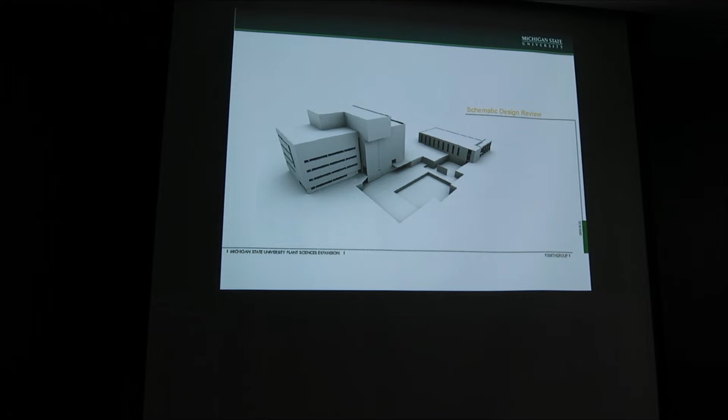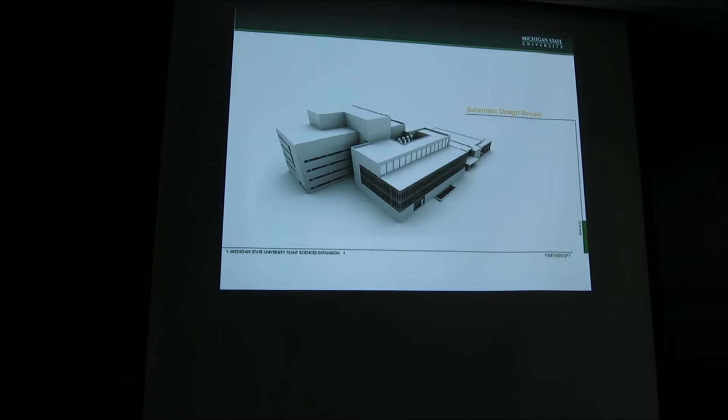One of them is the Molecular Plant Sciences, a new building connecting two existing buildings. By connecting them with this new addition, it became the face of this whole complex and allowed people to utilize research and equipment back and forth, using the greenhouses between the buildings.

It was one of the early buildings on campus with the concept of an open plan for researchers. Instead of having separate rooms, this open plan allowed researchers to work right next to each other, think about ideas, talk about ideas, rub elbows a little better, and share expensive equipment in their labs. It was really a new concept that we introduced here.

This became the face or entrance of the whole complex, and it's funny that both buildings think it's their building—it really belongs to both and added a new face to their operation. Inside, there are a lot of formal and informal places where people can sit down, talk, and share ideas. Don't undermine just a cup of coffee where you talk about what you did over the weekend or what you're doing next.

I have a nice, well-equipped technology auditorium in this building that replaced an old-fashioned one that was there before.

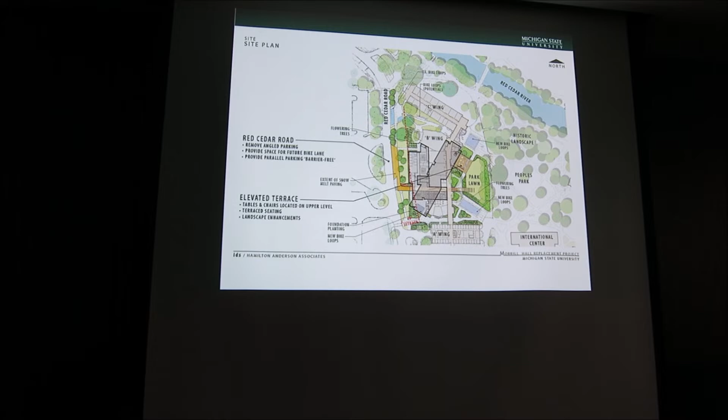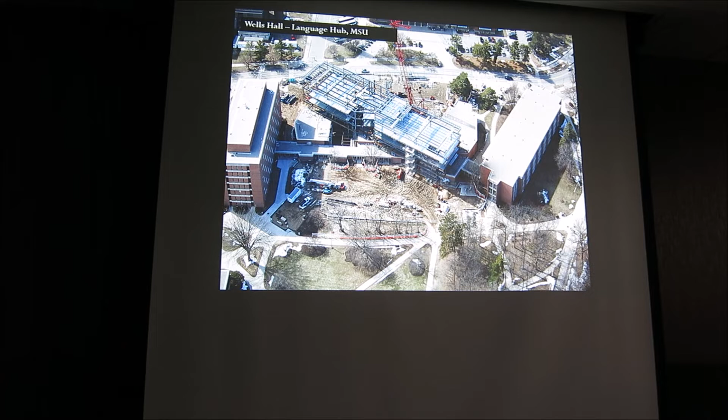I was also involved, as Dr. Muhammad mentioned, in building the Wells Hall addition. It's really an interesting project—a new structure on top of an existing B-wing. We had to literally thread the columns and foundation of the new building into the existing one and come up with the addition, which ended up being a great addition to this whole part of campus.

Beautiful outside areas that kind of link the education, where people can sit here and watch and see people walking back and forth to the bridge.

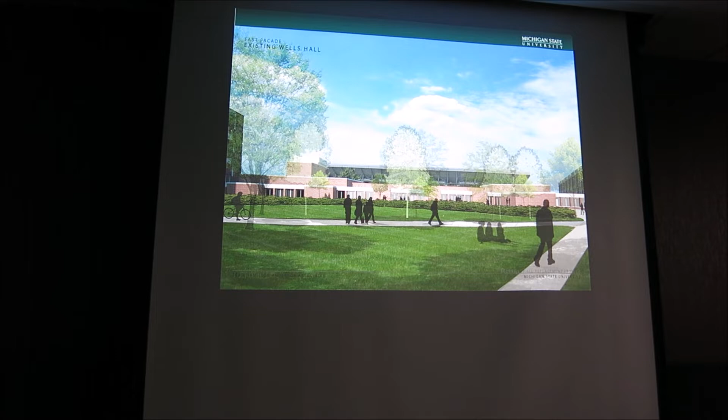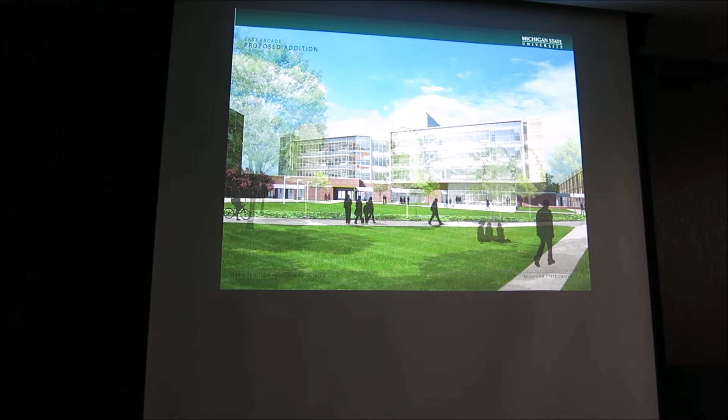This is what the building looked like, very bland, one story, nothing really special. And here it ended up with a facade that overlooks the park, so everybody in that building really enjoys the scene and the outside of this historical place.

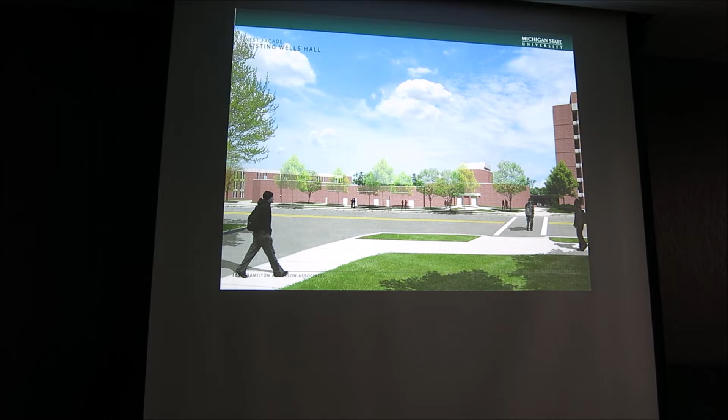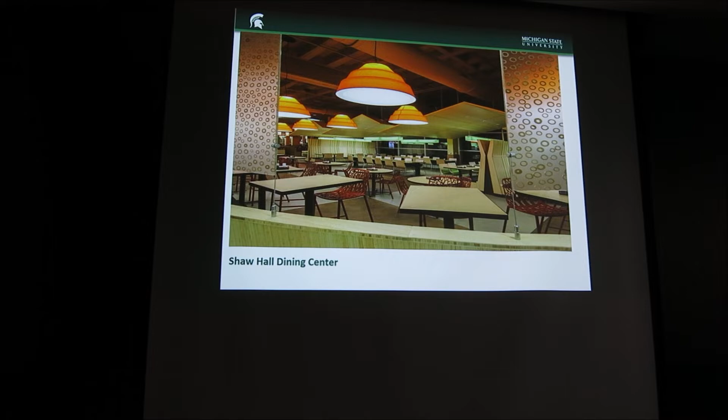You can come to the space many times without eating the same food or sitting in the same place, enjoying the different variety. More importantly, it overlooks the river, which is a beautiful scene all year round. This is another shot of it.

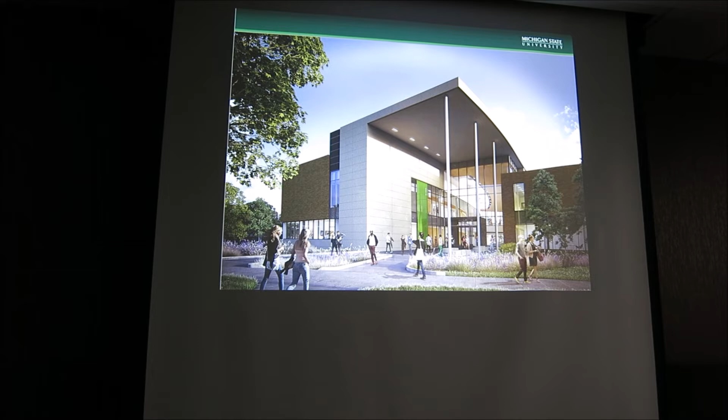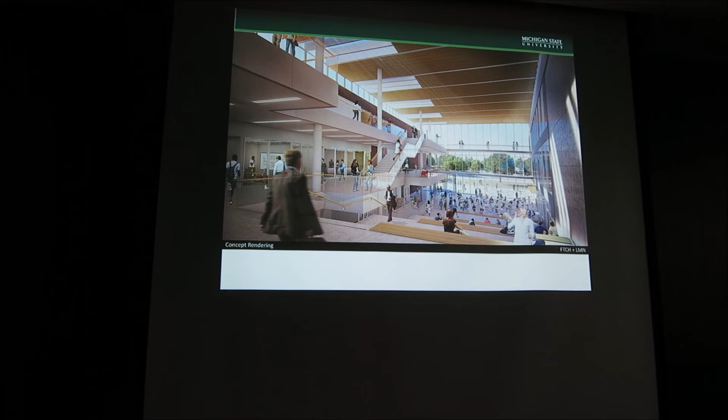One of the latest ones we just finished designing, and it's under construction, is the Business College. Most of you might have seen it on Shaw Lane. It's going to be a one-of-a-kind building on campus, with a place where students can sit and overlook the riverside, talk and interface in this beautiful atrium setup we created. There's a beautiful lawn on the north side facing the river, with a lot of activities connecting inside and outside.

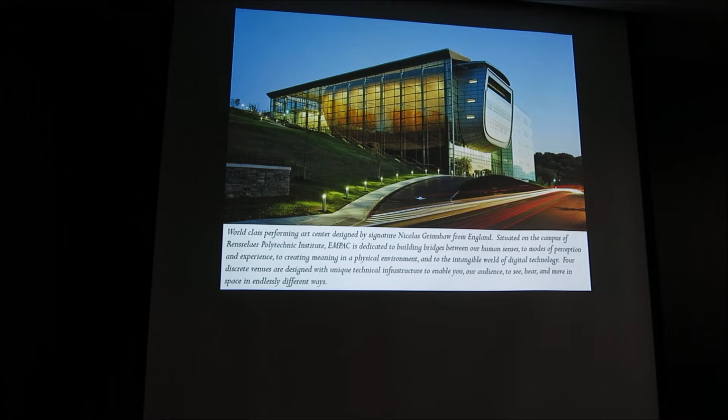I was also involved in another university, RPI, Rensselaer Polytechnic Institute, which had about $400 million worth of capital projects that really changed the face of that campus. This is a very interesting, one-of-a-kind performing arts center, built on a sloped hill. The idea was to build the hull for the concert hall so it looks like a ship sitting on that sloped hill.

It's designed by a signature architect from England. Beautiful place - if you ever go to Troy, New York, make sure you get the chance to look at it.

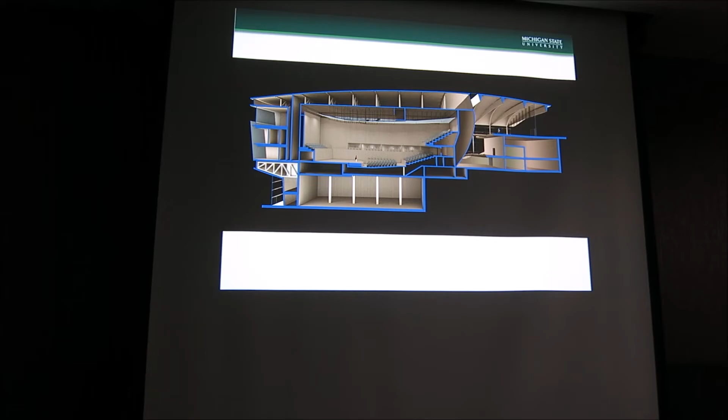This would show you how we set this building on that sloped hill, built the stub here, and anchored it all the way to the bedrock to hold it so it doesn't slide down the hillside. Very interesting project, also one of the earliest interdisciplinary research buildings built there, and it really made a big change in what the university is doing and the face of that campus.

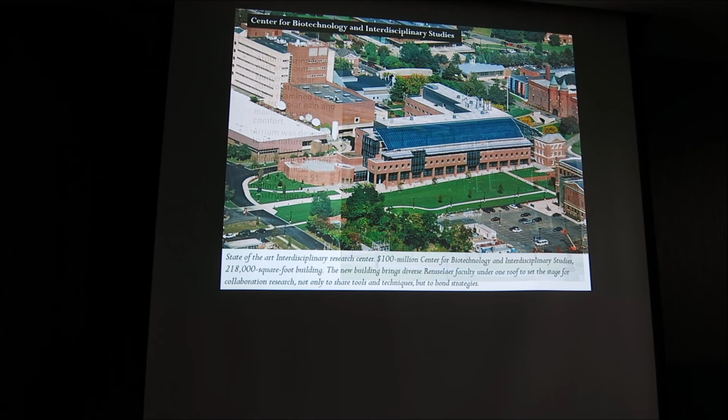Was also involved with MSU in Dubai. The entire campus housed more than one university, and MSU was supposed to be the anchor university there. We took the first 3 floors of the main building of that campus. Unfortunately, in 2008, they had the economic fall down and things did not work out economically, so MSU ended up pulling out of Dubai.

But one of the things that kind of shaped my career, especially with Islamic architecture, was working with this Egyptian architect, a world-renowned architect from Egypt who was way ahead of his time in terms of sustainability and what materials to use. His name was Hassan Fathy.

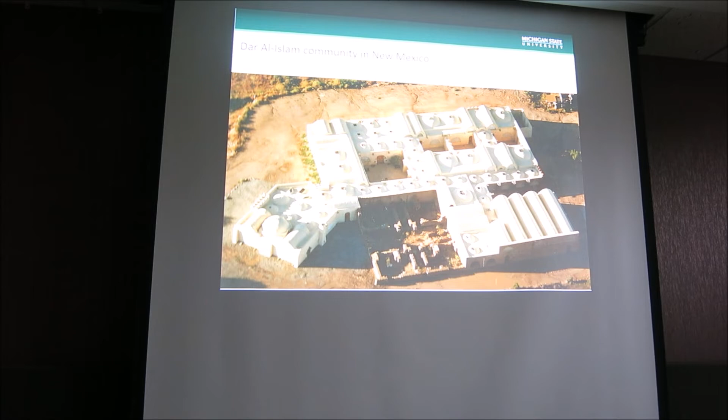He built a whole community here in the United States, in New Mexico, close to Santa Fe. It's a beautiful community using the same concept of mud brick, with the styles of domes and vaults.

We start with the mosque architecture. Architecture form becomes really the vehicle of the content. They can really symbolize what they are for. This is a fascinating thing, how architecture design can reflect some of the thoughts and beliefs of people. You will see how this has evolved and developed in Islamic architecture.

Architecture not only communicates the looks, the shapes, and the feel, it also has to function for the purpose it was built for. Masjid simply means a place of bowing down. This is how Muslims perform their prayers. They pray five times a day, and you can imagine having to work your schedule all the way around five prayers.

The importance of a mosque in the life of Muslims, and how this works in different places. However, you do not have to go to a mosque to pray. You can pray in your home, or any place that is dry and clean. But it's encouraged that you do it in congregation.

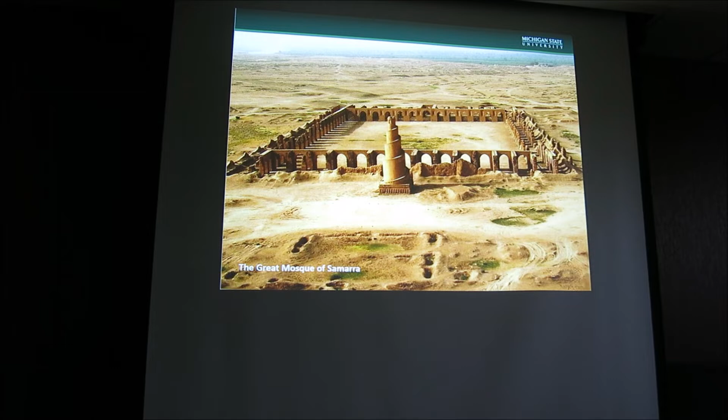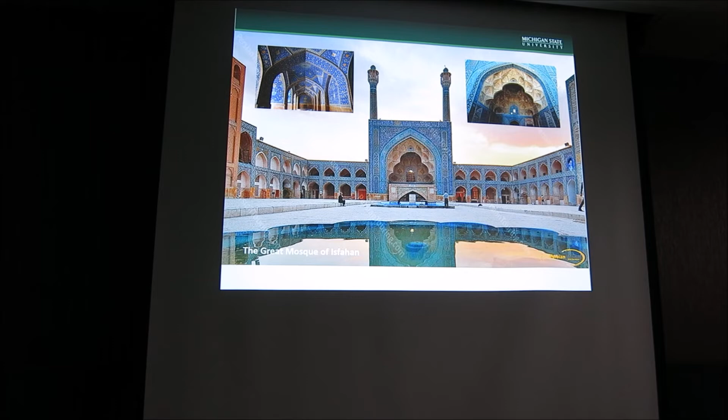If you look at some of these, it's really fascinating to me how they use different materials to accommodate building different mosques in different parts of the world. Everywhere you go, you will find that taste of what that mosque was built in and what it represents for the culture it was built in.

When Muslims pray, they orient themselves towards Mecca, so any place you build has to accommodate that orientation in how the building itself is oriented. The mosque is not an isolated building by itself - it's always connected with the sky, with nothing preventing that connection. Even when protected from the elements, you should not isolate yourself; the roof should not cut you off from the sky or that connection.

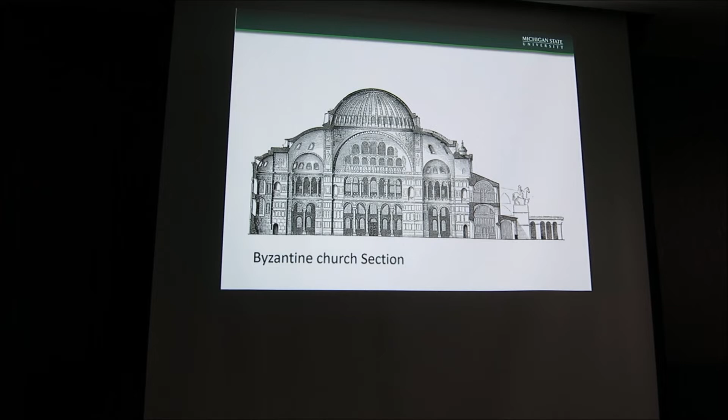It's not a building that's enclosed on itself, like you would see in a church. If you see here, the church dome and ceiling kind of represent the sky, and the walls and floors represent earth. So when you walk in, you really have this whole structure expressing itself.

In Islamic architecture, they changed the shape of that dome. Instead of looking like a half circle as in a church, they changed it to a different shape, which I'll show you in a minute to make it easier to understand.

On the left-hand side you have the one you'd see in a Byzantine church, and on the other side you see a square built on half arches, then a circle, and then the dome itself. Every single part tries to point upward towards the sky.

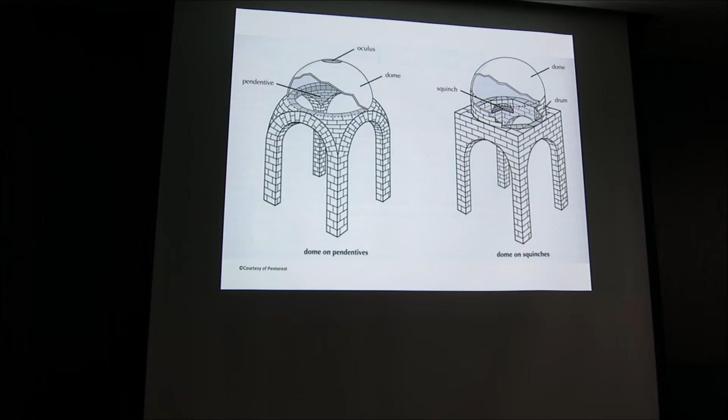Here's a look at that dome. It sits on a square, goes to an octagon, then to a circle, again narrowing down, pointing to the sky. And this is what it looks like when it's over and done.

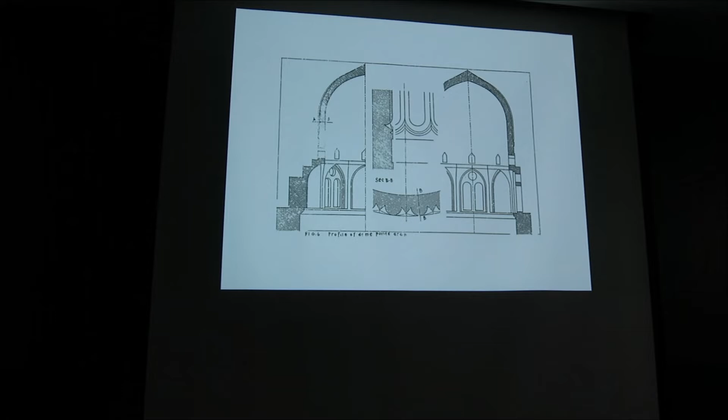The spheric form of the dome itself was modified to point upward, like what you see here. It's not just a half circle - again pointing up to the sky, giving that feeling of connection going up to the sky, and that connection in relationship with the sky.

In mosque architecture, the semicircle arch is avoided. Just having one circle go from one side down to the other is avoided, and they try to use pointed arches that show the line of forces. If you look at the first one in A, the arch starts from one side and goes down to the other, while in different shapes it always points up, and your eye can catch that movement going up into the sky.

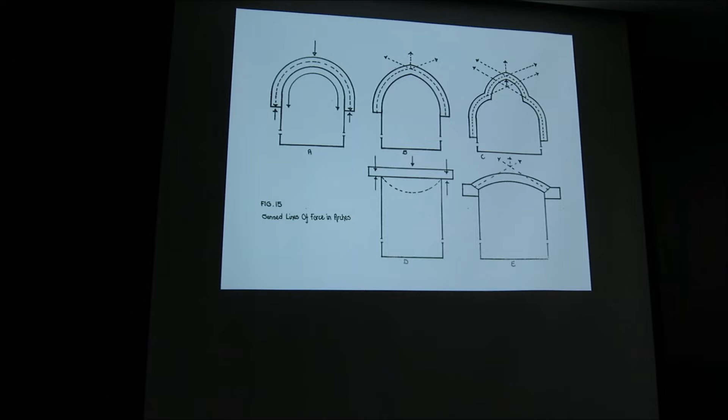In Egyptian mosques, they started doing little variations, depending on the region and people's creativity. It started to have a narrower bottom, suggesting the sphere appears to fly in the air, as if it's not just a ball. It narrows down a bit at the bottom, but it's pointing up and looks like it's flying in the air.

In Iranian and Central Asian mosques, this feature was accentuated even further, making it look like a ball that is flying, as you can see in variations of different mosques built in Asia.

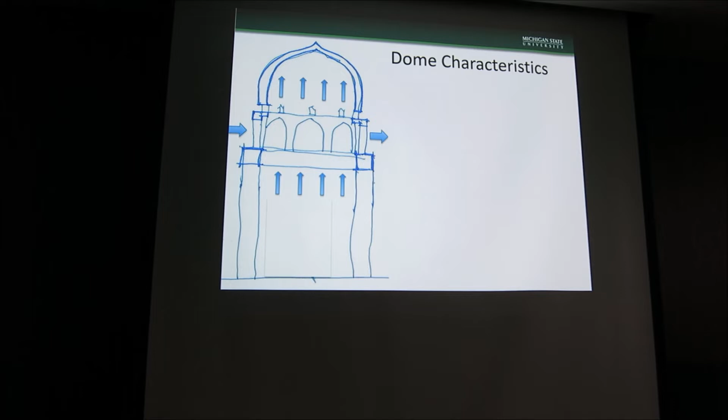The dome characteristic itself as an element is really interesting when it comes to what it does to a room like the one we're sitting in - the hot air with its directions causes adjustments in how you lay out the mosque itself, the prayer area, and the relationship with the entrance.

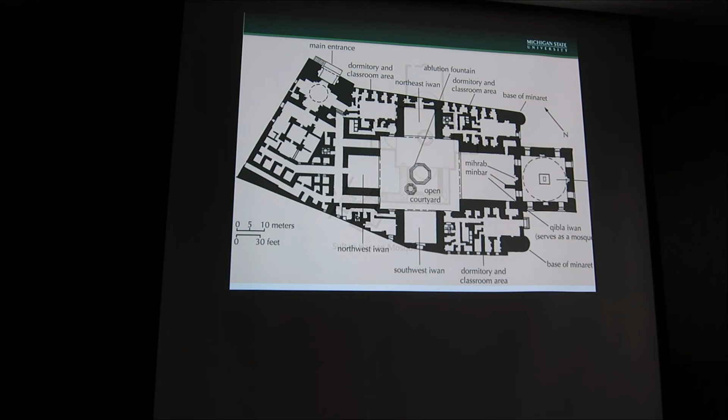If you look here, up on top is the main entrance. This is Sultan Hassan in Egypt. You see here where the street lines up - people come in, then turn around and face the body of the mosque that's oriented towards Mecca. This shows you where you start and so on.

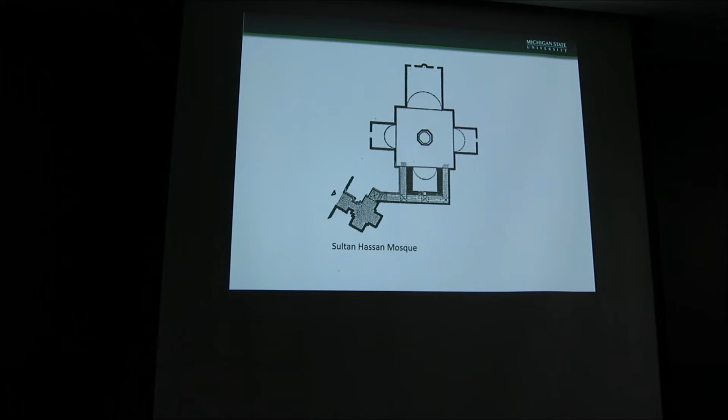Another function of that is symbolic - when you enter the mosque, you leave everything that keeps you busy and focus on what you're here for. This is a really beautiful meaning. That transition for people, from one door to the other, really gives you that transition - coming from outside with a busy life and focusing on what you're here for.

Another feature of mosque design is having only one door. They only have one door in the mosque, symbolizing the oneness of God. It also symbolizes that there's no VIP entrance versus a normal people's entrance - we are all one, all equal when it comes to where we're going and who we're trying to seek. So, equality of humanity.

Of course that's changed a little now with egress requirements based on the certain space and number of people - you need to have multiple entrances. But that was the reasoning behind having only one entrance. And entrances, as you see here, are really humble - huge and humble and lofty, resisting that and welcoming people, without a big huge canopy, flashing neon lights, and all of that.

It's really that kind of nice, sitting back, receiving people, having this huge scale when it comes down to that, in different places. And another feature in the mosque is what we call crenellation.

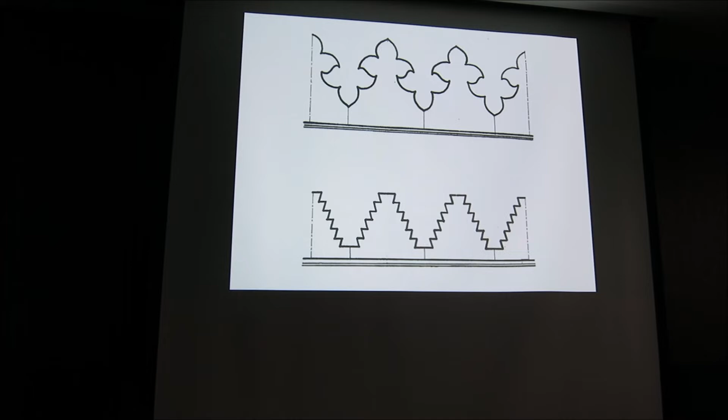This is what crowns the walls of the mosques, and it would look something like that. If you see, this is kind of interesting, because the void is the same shape as the solid - body and soul, the connection between earth and air and the sky. You have that equality that you see here in the edge of that wall. The wall is not just a cutoff of this building from the sky. Again, this whole notion of how you connect it and what that symbolizes.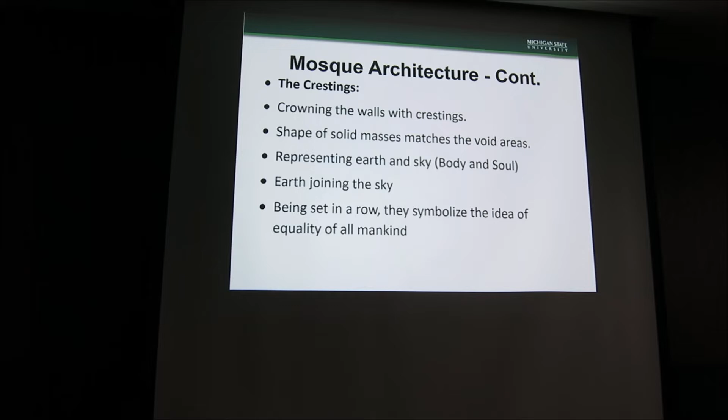It matches the void, yeah. That's also representing earth and the sky, joining the sky. Also, that lining up in a row kind of also symbolizes the equality of mankind. This is another shape.

Then we come to a minaret. Minaret is a very important element in architecture, Islamic architecture or mosque architecture. They have this symbolization of connection to the sky. It gives the vertical elevations, the elements and the looks to the body of the mosque itself, as movement upward, as we discussed in many different places.

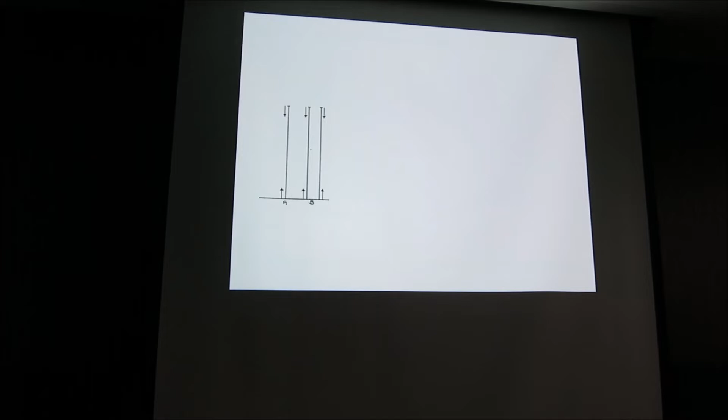Architecturally, if you look at this line here, can you tell where this line is going? Is this line going up or coming down? Really can't tell - could be anyway, could be both. And if I have another line right next to it, two parallel lines, again it doesn't give you direction. Those are just two parallel lines, it could be up or down.

But if I have this line and start segmenting it, where larger areas are at the bottom, then it goes up, your eye will go up. This gives you an up direction. Then we add another element - those lines that are parallel, they are tilted a little bit. Your eye would go towards where those two lines would meet - so again, pointing up to the sky.

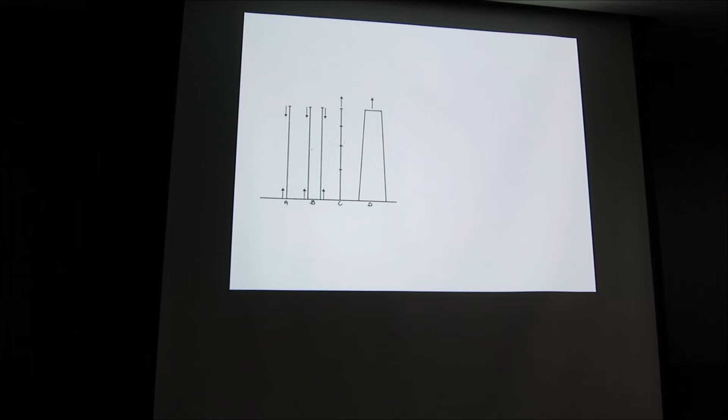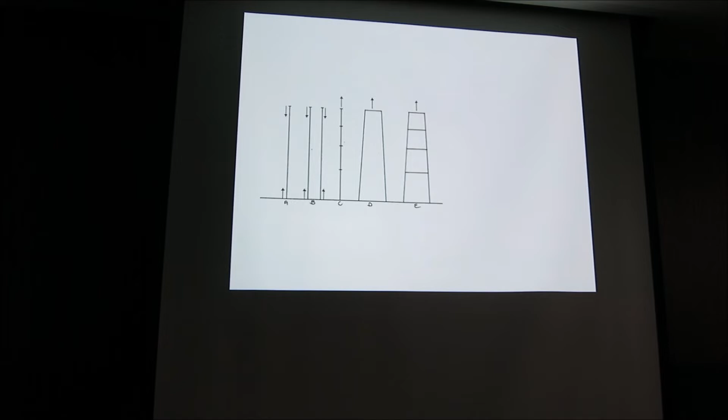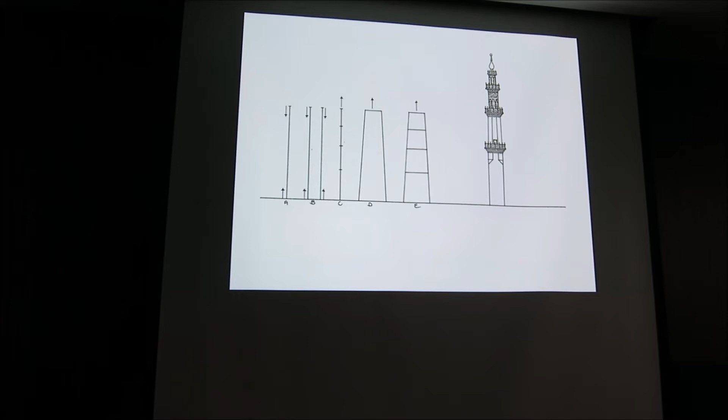Then if I add segmentation to these two lines, it would even force or focus that whole feeling and sense. That's exactly what the minarets would look like here. The bottom line is bigger, segmented, different shapes; going up it's segmented and narrower, pointing up to the sky. So it just shows you the sense of the feel, how this would look.

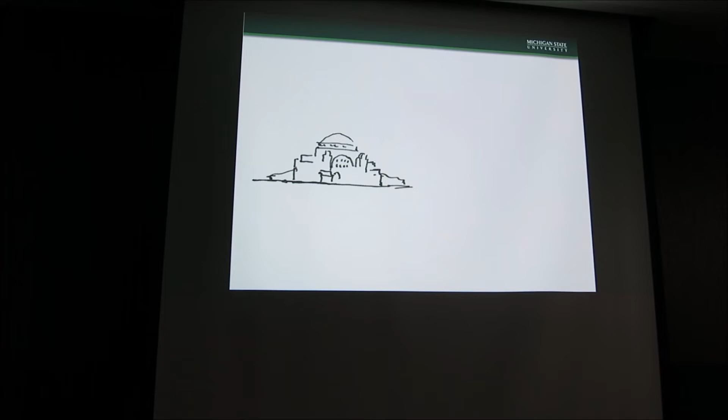The minarets changed the pointing of the building itself. This is Hagia Sophia in Turkey, before they added the minarets to it. Just look at the building here, see how it's a building that's contained and sitting on the ground. And when you look at it after building the minarets, see how that changed the whole looks and feel of the building as an element.

Traditional Islamic architecture is one of the most successful building types when it comes to sustainability. That's another subject - how these people, when they build, always had in mind how can we be, what we call now, green design. Using local materials and local techniques, and we have seen from the variations of many different mosques shown earlier, using what they have beneath their feet.

Coordination and balance between form and function - not just the shape and the looks, but also the function itself, what's happening inside that building or facility. The elements work side by side; they are not really contradictory. They all have the same goal when it comes down to the shape and what they try to do.

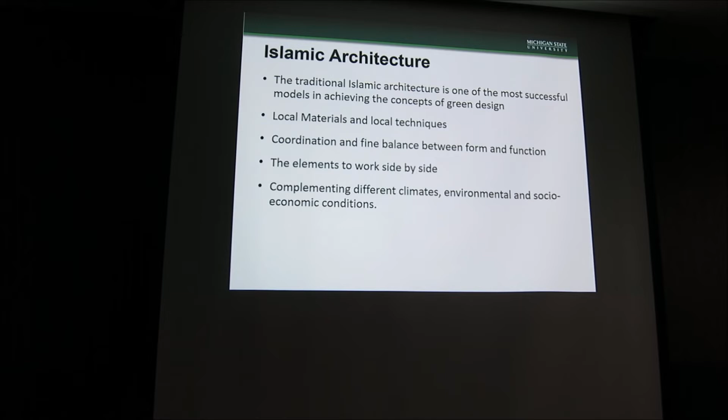Complementing climate, environmental, social and economic conditions - they use a lot of thick building walls that help with hot climates, preventing the sun from seeping through the building. It takes a while for that heat to transfer inside the building, and by that time it would be nighttime, and then the whole thing reverses from inside to outside at nighttime. So that's another thought behind using it.

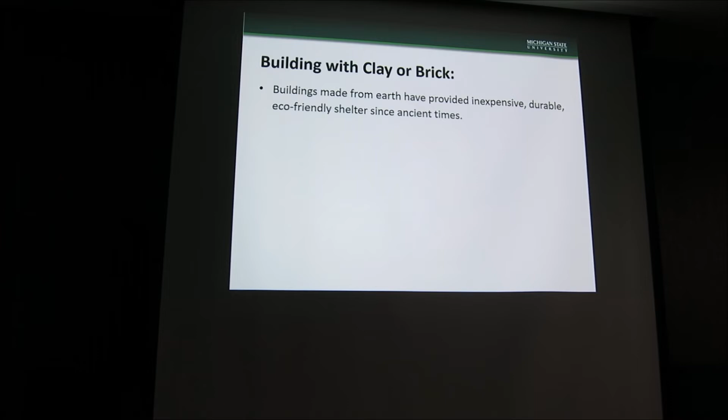Using clay or brick was very common in a lot of these buildings - inexpensive, durable, easy to find. Eco-friendly, you don't have a lot of different effects and all of that. The materials are important to protect the building from external conditions - the optical aspects, the reflection, the thermal conductivity, the heat transfer.

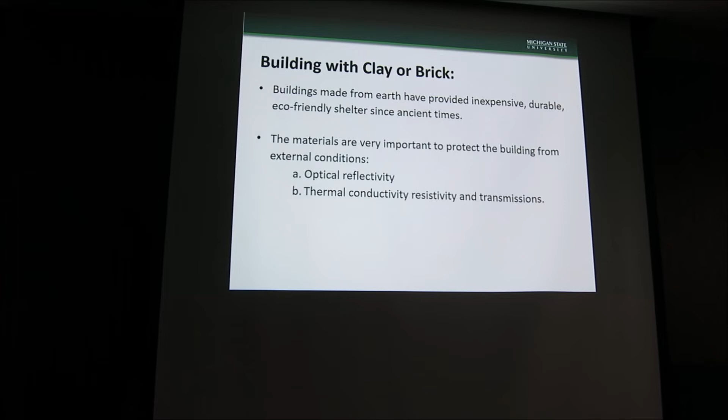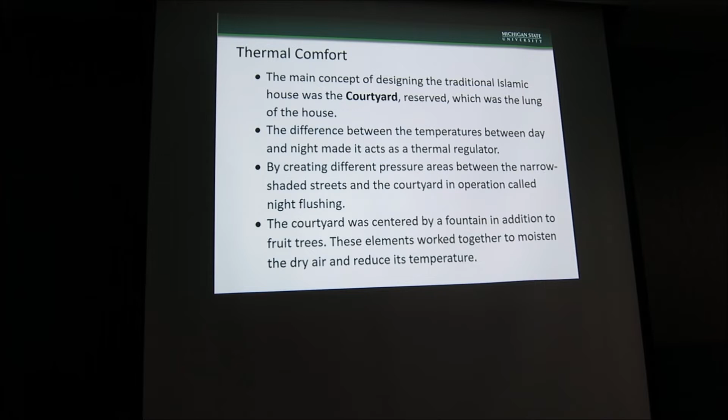That would have some trees that you might start seeing birds and seeing a lot of different things, that comes with that as an element. The shading elements, of course, the tree and all of that stuff helps a little bit with the moisture and reduce the temperature, as you see in many elements like that.

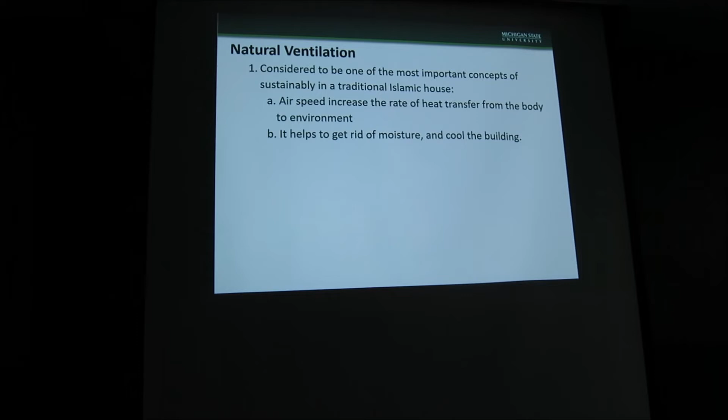Natural ventilation is considered to be one of the most important aspects of Islamic architecture. The airspeed increases if you have a narrow tube. When the air comes through it, it focuses and increases the speed of the air movement, from the top to the bottom, and it helps to get rid of the moisture and cool at night.

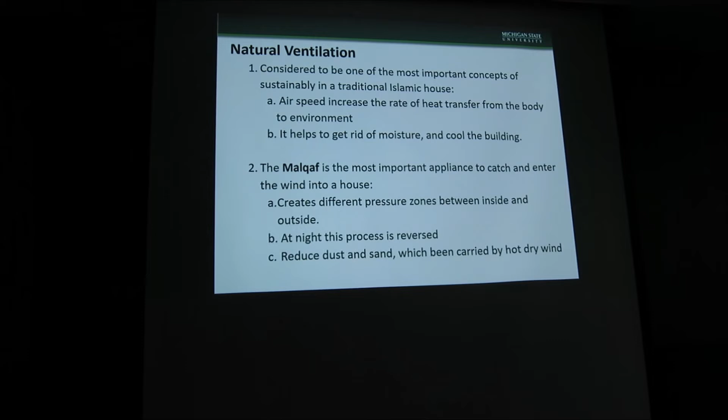So they created something called Malqaf, which is like a tower that catches air inside the house, in a narrow shaft. At the bottom of that shaft, they would put clay bottles with water, like the refrigeration we have currently with the cool air coming down. This is where the water would be, and they can cool the water out, helping at night. This whole process would reduce the dust and the sand that comes towards the house.

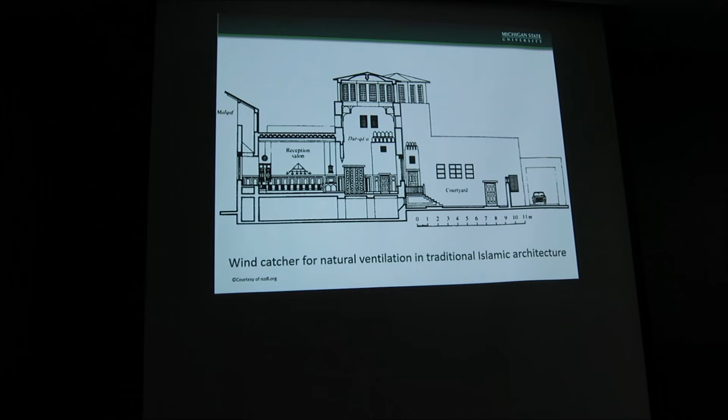These are some of the shapes, but if you look at the bottom here where the Malqaf is, the air would come in and through the house, and out to the courtyard. It really gives you that variation, creating nice wind ventilated areas, allowing for the whole movement.

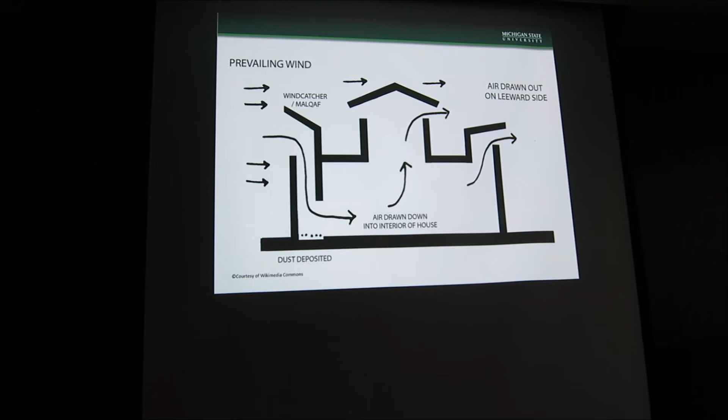I just came last night from South Korea, and I was amazed with the many towers they have. When you have a child living on the 26th floor of a building with no balcony, how would they enjoy even the natural air, the natural environment? So these traditional buildings really thought about a lot of things, including this whole notion of ventilation.

Natural light reduces the thermal load. When the sun hits the building, it adds a lot of load. When we build new buildings, we always think about the orientation, which side of the building, how big the window is, how much heat gain we will have, and that determines the amount of mechanical systems needed to ventilate the building.

So they thought of providing natural light that would allow sunlight to come in without the direct sun, without a lot of the heat that comes with it. They found that reading and vision is 3 times better with natural light than with artificial light. Windows are considered to be really a hole inside your wall, and usually the R value or resistance value of a window is much less than a big composite wall.

So how do you deal with that? They created something called mashrabiyah, an architectural element that allows wind to come in and prevents the direct sun that causes a lot of heat gain, controlling light overflow and outside exposure. More importantly, there's the issue of privacy—you do not sit in a place where people outside can see you, if you need that kind of privacy, that would be provided.

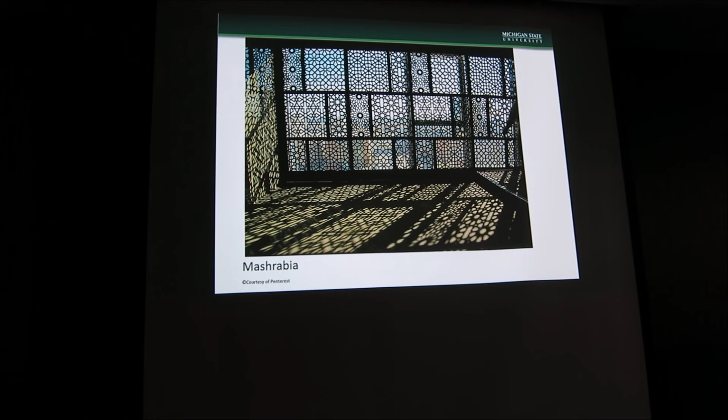I'm trying to wrap up, and hopefully we'll have more questions if you have any. I teach this class to a social science class here in Michigan State, just once every term. That class is learning about different cultures. I usually have this slide here.

Likewise, cultures are different, and they add up, they don't take away. So students learn and understand, enjoy the cultures, enjoy people living in a different way, different lives, enjoy their food, enjoy their language—it's just that variation that adds up. Everything around us has that beauty of variations.

You don't have the same tree. You know how many different types of oranges or apples that we have? All one is a little bit different, slightly different, and offers something different. So the message here is culture is a great thing to enjoy. If this was all the same, we would not have the same enjoyment that we usually have.

This is very quickly, I wanted to go through it, and hopefully we'll have questions if you have any. Thank you.